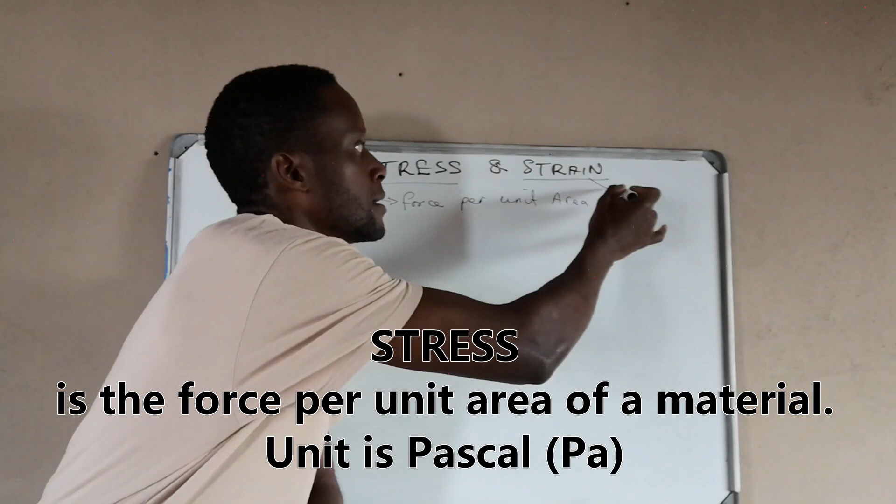Okay, then strain is a ratio between the change in length and the original length.

So basically, for us to understand this, I came up with an elastic. I hope you can see that. So what happens is that if I apply a force on this elastic, it becomes longer. So this elastic, because of the force that I apply on it, it is undergoing stress, and at the same time it is having a strain.

Strain is the change in length. So without applying a force on this elastic band, there won't be a strain. So stress on the elastic causes strain, but then we'll go into detail about how we calculate and how we differentiate those ones. So like we have said, stress is the force per unit area.

You need to know what force is, basically just the unit for force. We know the unit for force should be newtons, we're using N. The units for the area should be square meters. So stress is represented by that symbol.

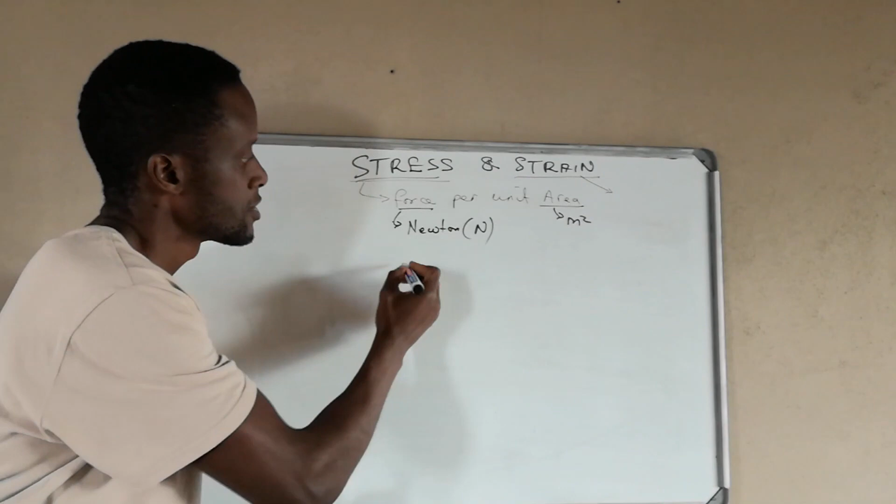Is the force over the area, the unit area of a surface. That is our stress. The unit for stress is Pascal. You'll be using PA as the unit for stress. Pascal, force over the area.

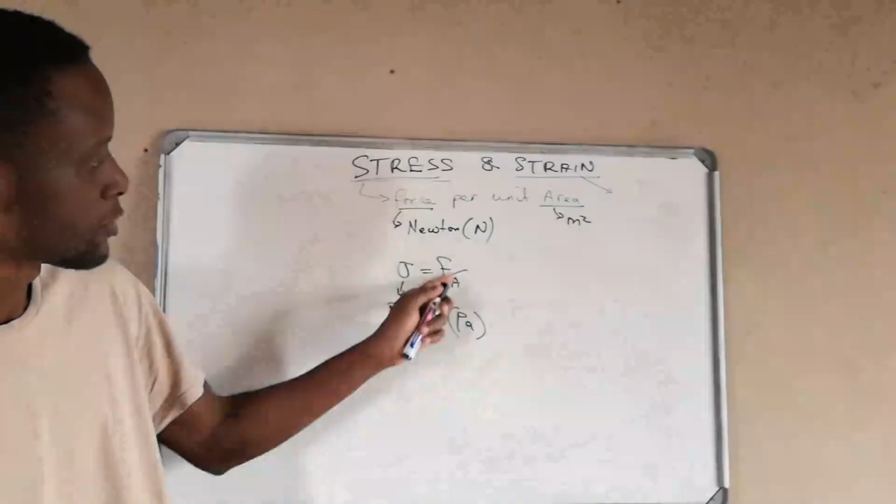If we remember in hydraulics N3, even hydraulics N4, this looks like just the unit for pressure, and the formula looks like the formula for pressure, which is just the force over the area. So our unit is Pascal.

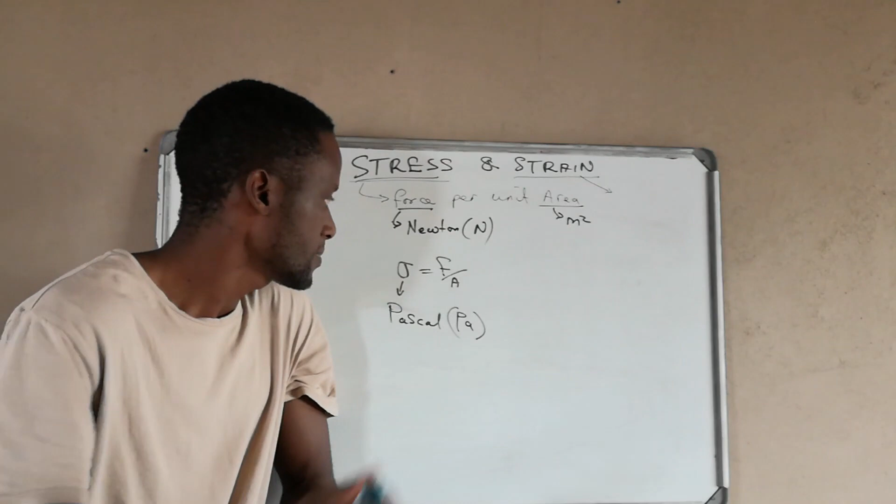Basically, just make sure that your area, before you calculate, your area should be in square meters, your force should be in newtons. Otherwise, your calculations are going to be wrong. So make sure before you do any calculations, make sure you know that your force is in newtons, your area is in square meters. So now, you also need to know how to calculate for areas of basic shapes.

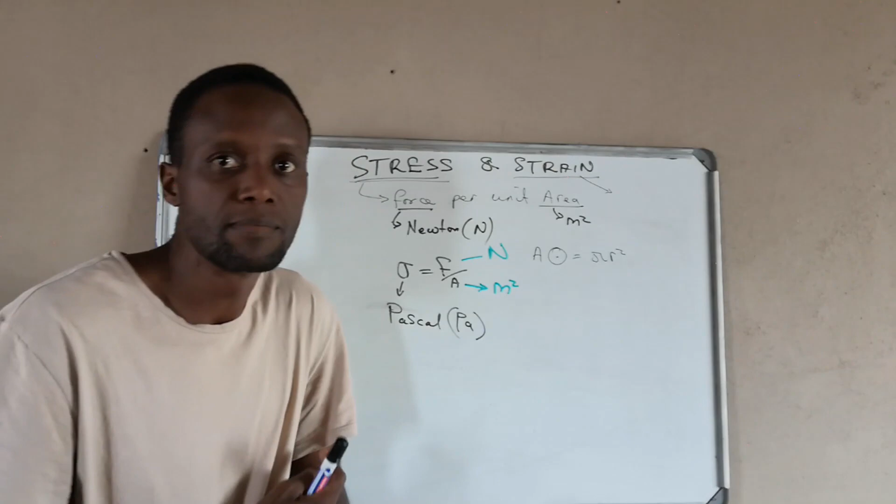Basic shapes, I mean, let's say they say calculate the area of a circle, which is pi r square, pi times radius square. But when you calculate for that area, make sure your radius is in meters, so that your answer is in square meters, in order for you to use it in this formula that we have here.

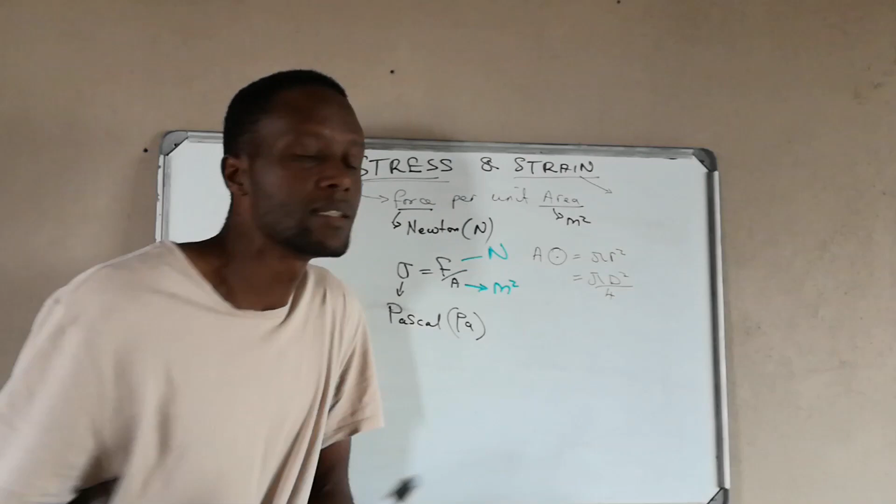Or you can use pi d square divided by 4, we can use that as the area of a circle. Again, your diameter should be in meters, and then when you square it, we get our answer in meters squared. So my whole point, my emphasis is that make sure your area is in square meters. Otherwise, our calculations are going to be wrong.

If let's say area of a rectangle or area of a square, this is L times B. Make sure both the length and the breadth are in meters, so that our answer again is in square meters. Area of a triangle, half times the base times the height. These are just basic shapes. Probably this is grade 7 or grade 5.

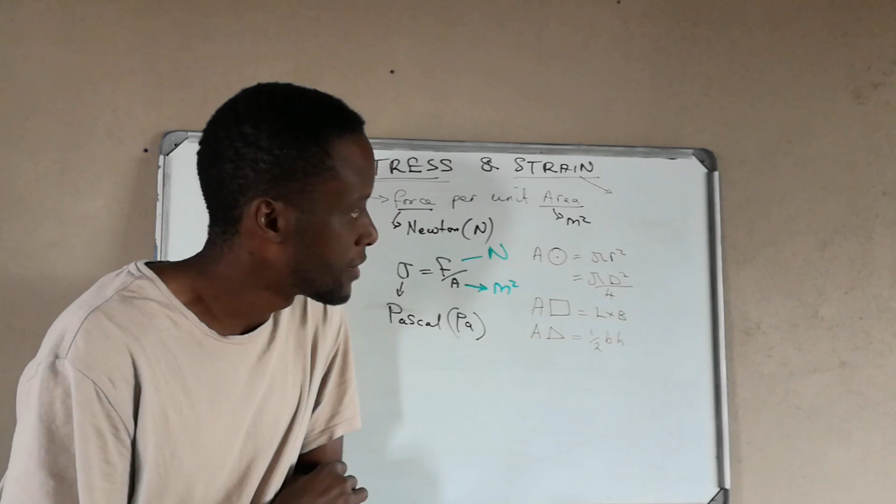So, but we need to know how to calculate area of basic shapes, and also how to calculate the dimensions of shapes. In most of our questions that we might come across, they'll just give you the dimensions of the shape or the profile of the object that you're looking at. Then before you can calculate for the stress, you need to calculate the area separately.

Alright, now sometimes they may not give us the dimensions, but they might give us the area already. And the trick will be that they'll give you the area in centimeters square. If let's say suppose they give you the area in centimeters square, this should be converted to meters square. Now how you convert centimeters square to meters square?

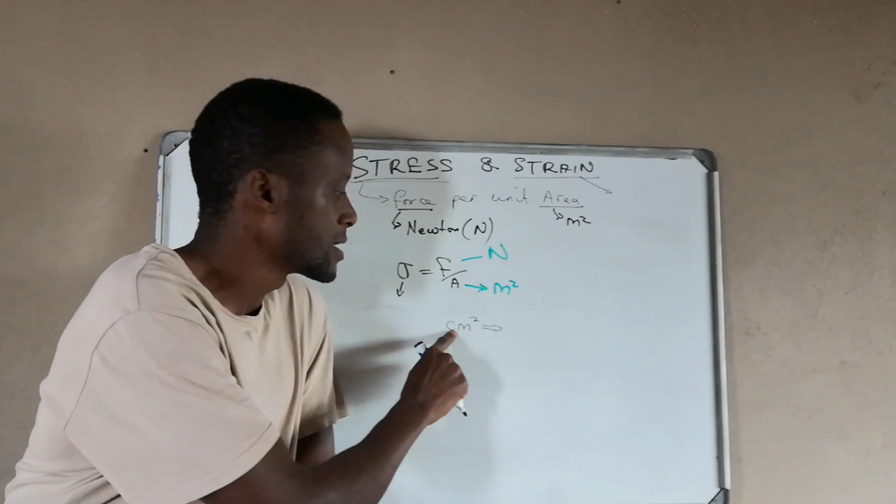What we know is that the prefix for centi is times 10 to the power minus 2, but then we'll square that, times 10 to the power minus 2, times 10 minus 2, then we square that. This becomes exponent minus 4, then this is square centimeters. So centimeters square is to the exponent minus 4. Same applies if we are looking at millimeter square. Millimeter square, we know milli is times 10 to the power minus 3, but when we square that to meters, it becomes times 10 minus 6 meters square.

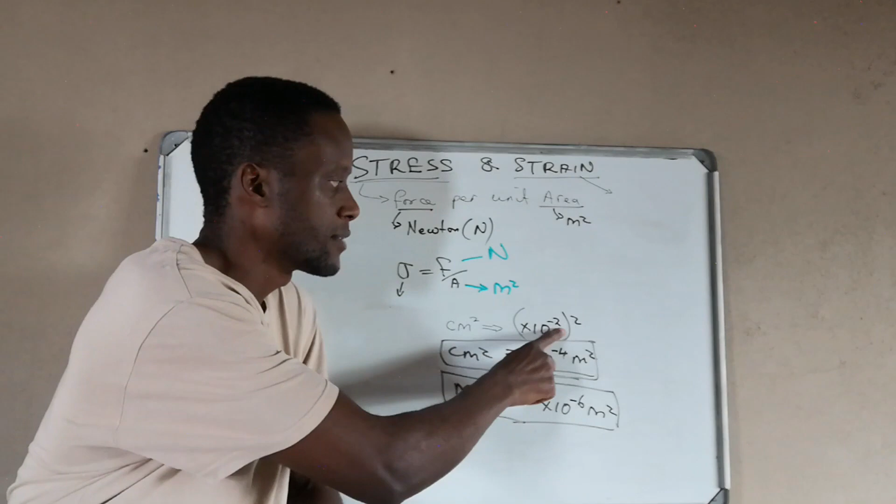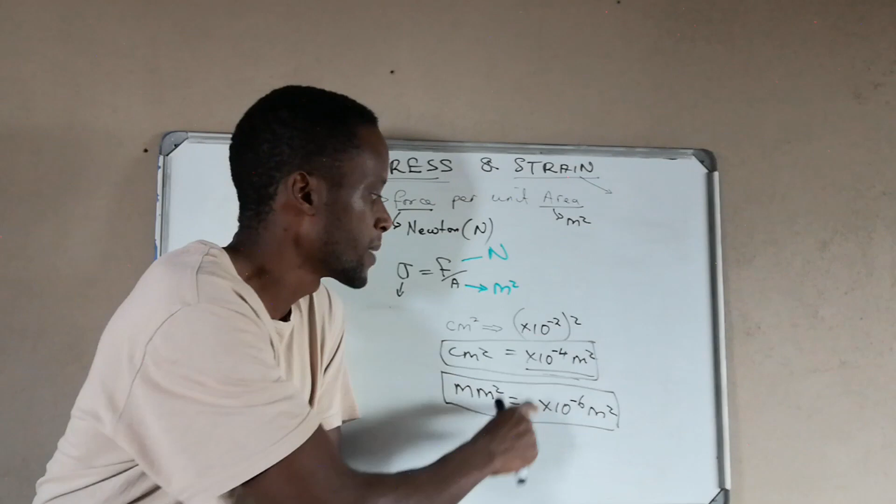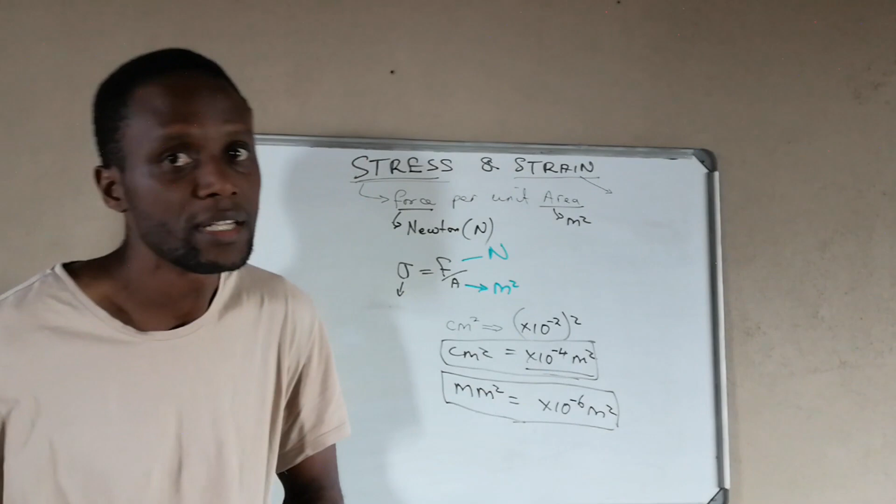This is what we'll be doing in case they give you your area in centimeter square or millimeter square and you have to convert. You can do the same to any other area, as long as you know the initial prefix value for whatever unit is given. If it is centi, we know the prefix value is minus 2, so we square it and it becomes minus 4. The same thing, this was minus 3, we square it, minus 3 becomes minus 6, multiplied by 2. That is how you convert the area given to you, and then it will be much easier to calculate.

Strain is the change, it's a ratio between the change in length and the original length. So with that in mind, strain is a ratio, we should always keep that in mind, which means strain does not have a unit, it's just a ratio, it is just a number.

When we come to strain, it will be represented by that symbol, it looks like a 3 facing the other way. Strain is a ratio between the change in length over the original length. Now all of these lengths should be of the same unit. If you're using meters, then your change in length should be in meters. If you're using centimeters, your change in length should be in centimeters. Other books or textbooks will use X for the change in length, but it does not matter what symbol they use, as long as we know it's the change in length over the original length.

In most cases, this will be a very, very small number, maybe 0.000 something. So in most cases, they will express it as an exponent to a negative power. Let's say they might say maybe 13 times 10 to the power minus 4, as just a number with no units. So strain, that is what we are looking at.

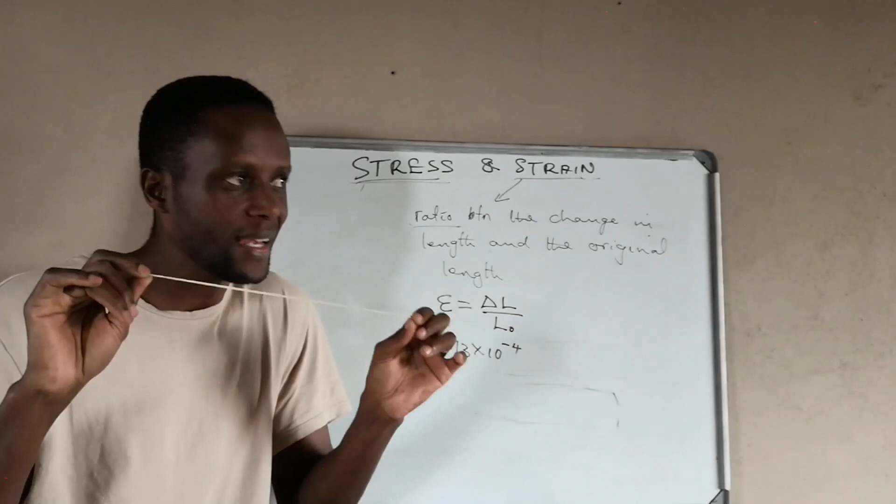There is a change in length. Remember the example I gave of the elastic band. If we have an elastic and we exert a stress on it, what we see is that the elastic becomes longer. That change in length, compared to its original length without any force applied, gives us a change in length. How much extension we have, that is what strain is. It's just a ratio between the change in length and the original length. Strain has no units, it's just a ratio.

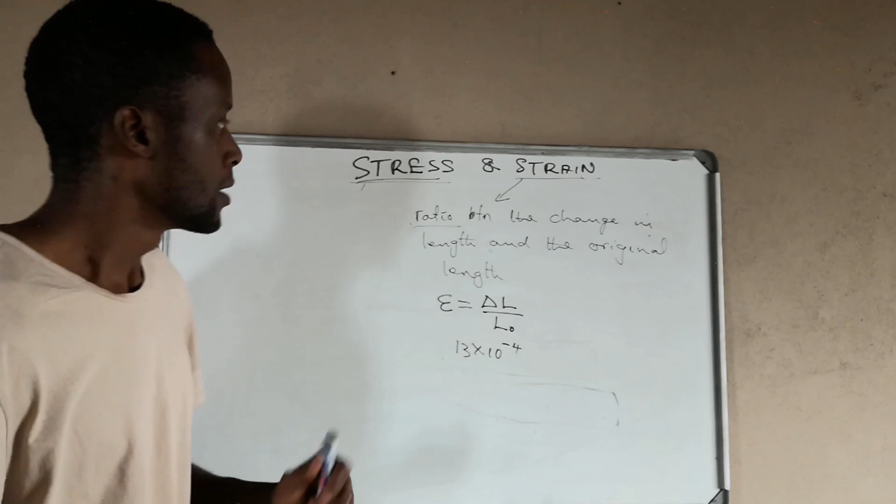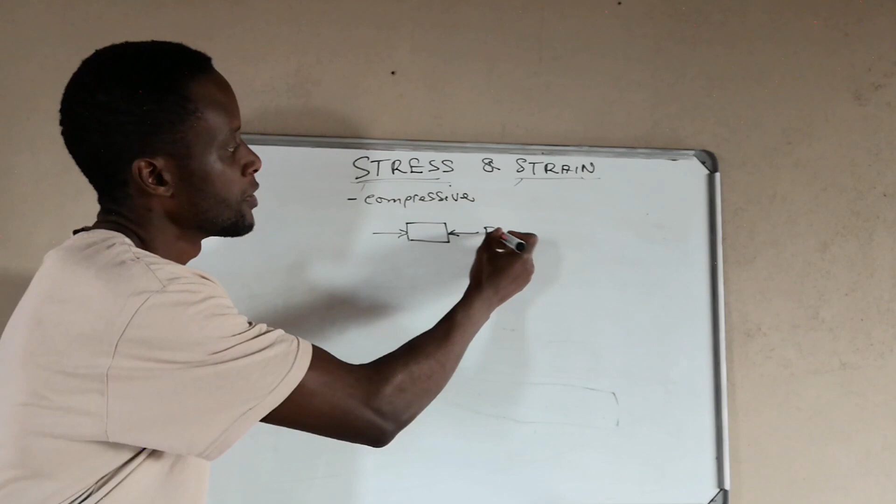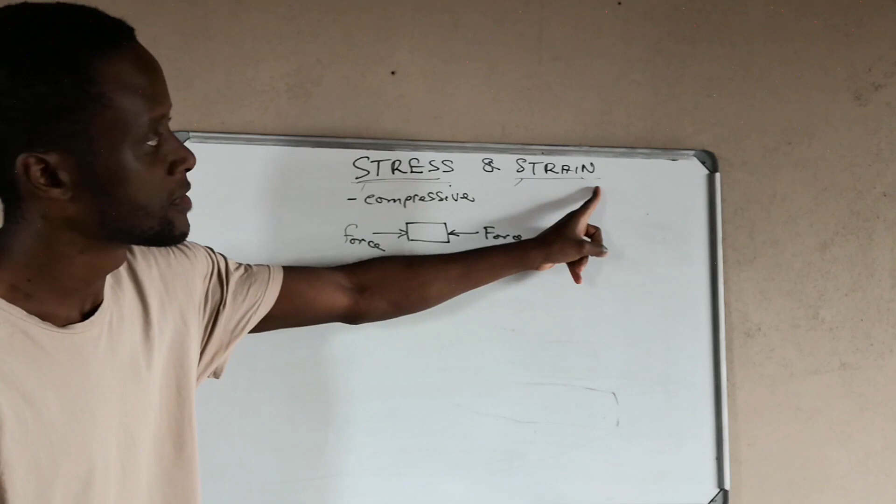It's a unitless value. Now with these two in mind, we cannot have strain without stress. There is no strain without stress. There are 3 types of stresses. There is the compressive stress, or compression, whereby the forces acting on an object - if this is our object, there is a force acting in that direction, and a force acting in the other direction. We are compressing this object from both sides, forces on both directions. This object will undergo a compressive stress. We are compressing it, but if this object changes in its length, then it is undergoing strain.

So strain is a measure. In other words, you can say strain is a measure of deformation, or the change in the dimensions of an object.

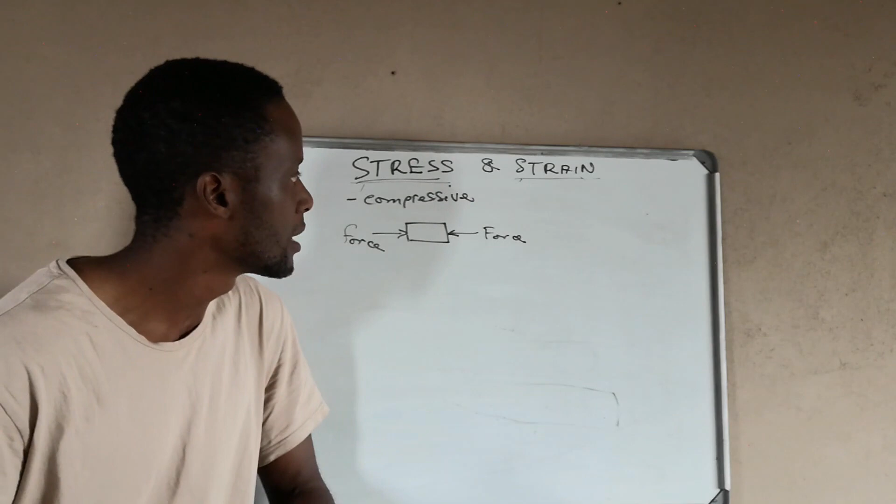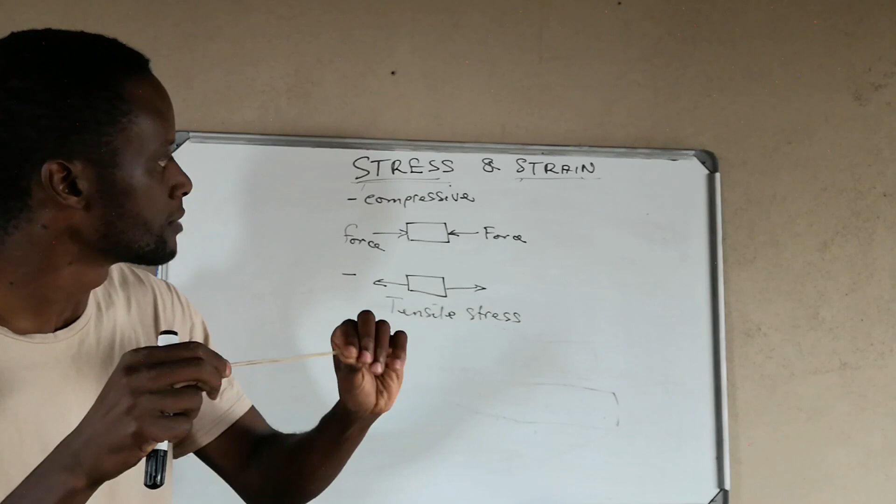Then the other type of stress - we can have an object, and the forces are pulling this object, like the example I gave of an elastic band. This type of stress is called tensile stress, or a tension. We are pulling the elastic in both directions, we are pulling it apart, exposing or making a tension in that object. We are subjecting this elastic to a tensile stress. Then the other type of stress that we have is known as a shear stress.

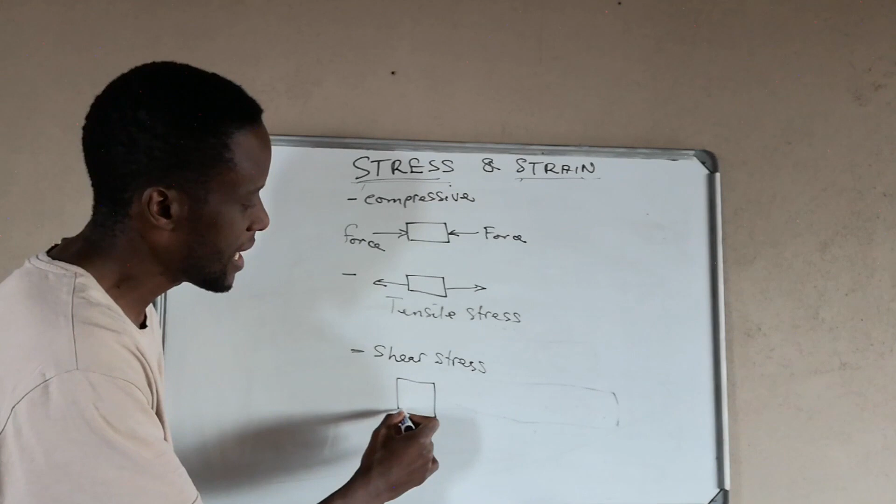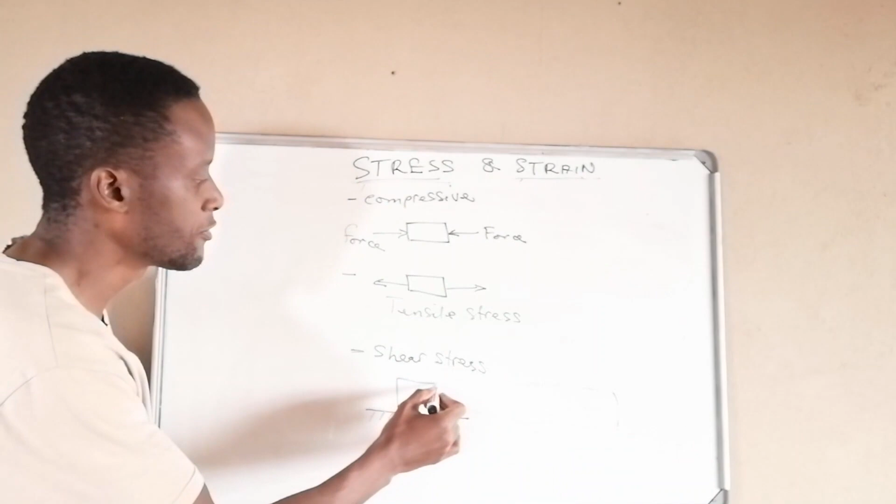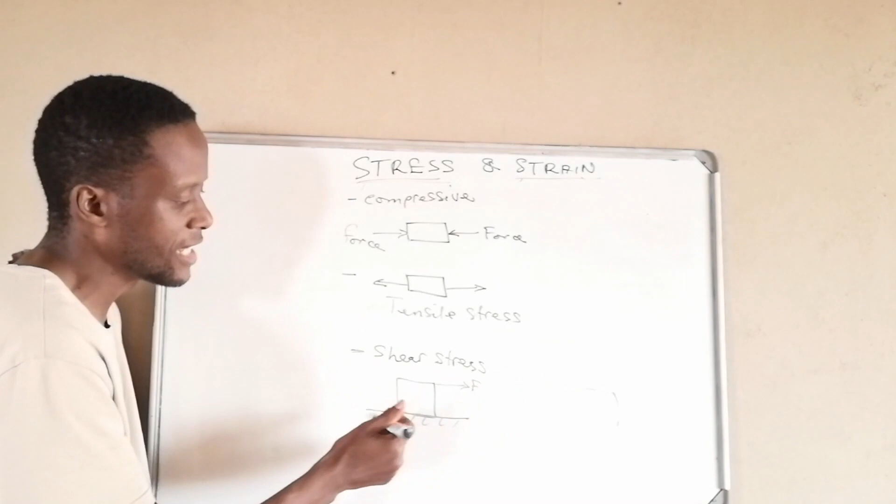Okay, shear stress. The easiest way to demonstrate shear stress is when we have forces that are at a tangent to the object. Let's say this object is fixed on this surface; it will not move. The force acting on it is acting at a tangent, at a surface point, whereby if the force pulls in that direction, this object will deform to go in that direction. It will shear off, it will slant in that direction, but the object still does not move, it remains in the same position, but it is sheared into another shape. So this object is being subjected to a shear stress.

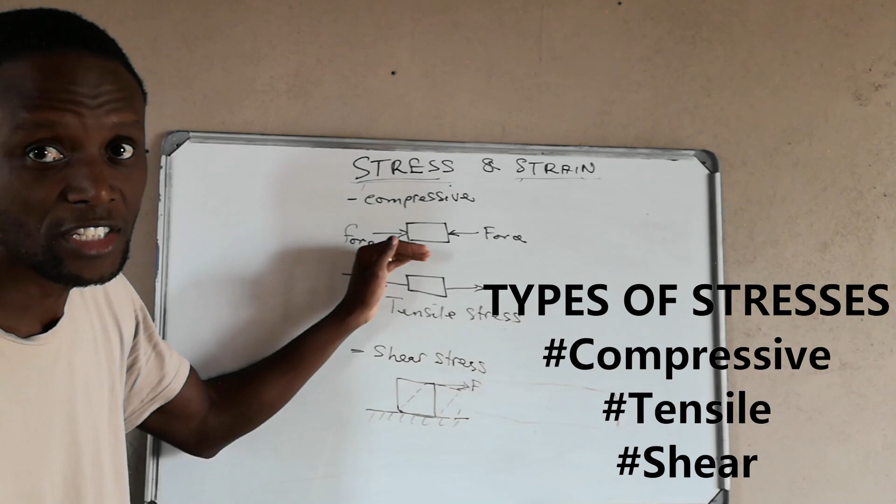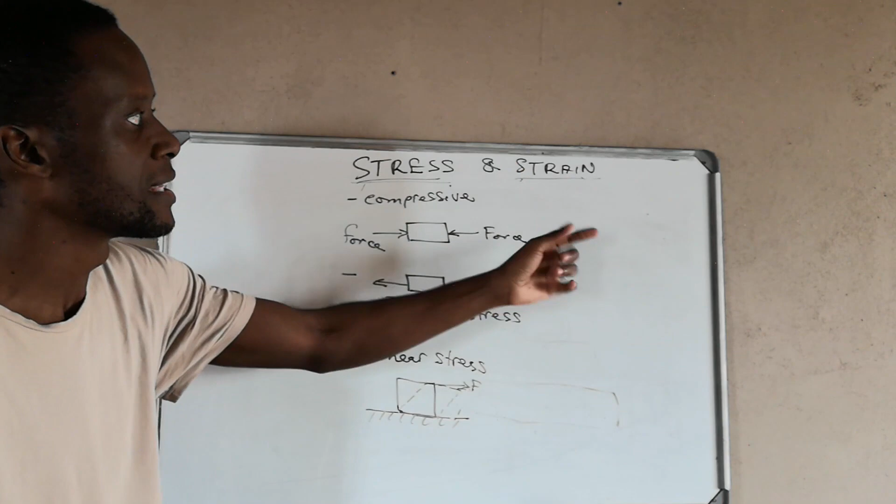As long as the object moves or changes its dimensions, there will be a strain associated with that. So as long as there is a stress, there will be a strain. We can never have a strain without a stress.

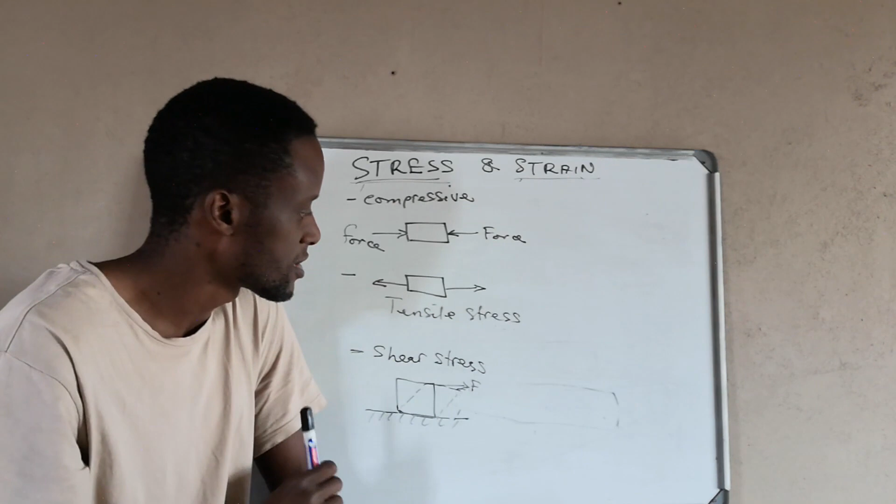You need to know the three types of stress, but the unit still remains the same: stress is measured in Pascal, while strain is unitless. Whether it's a compressive stress, a tensile stress, or a shear stress, we shall always have the unit in Pascal. Now, with these two combined, since we can never have a strain without a stress, we are required to know or state Hooke's law.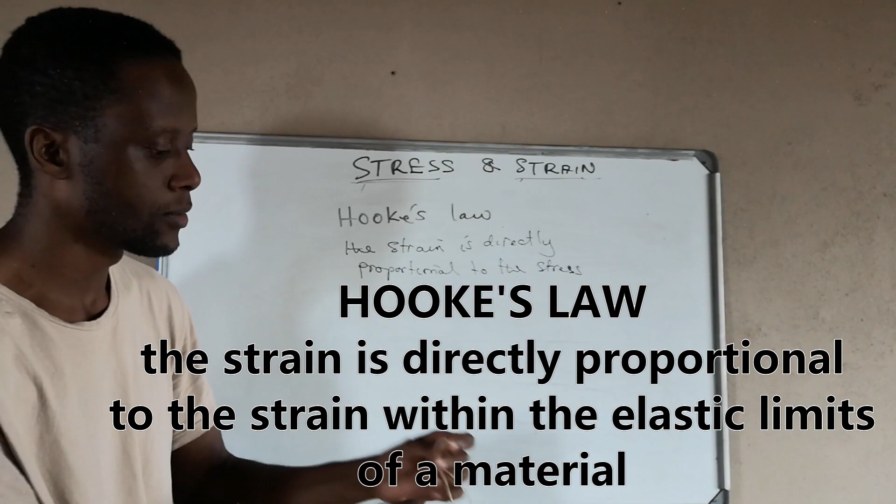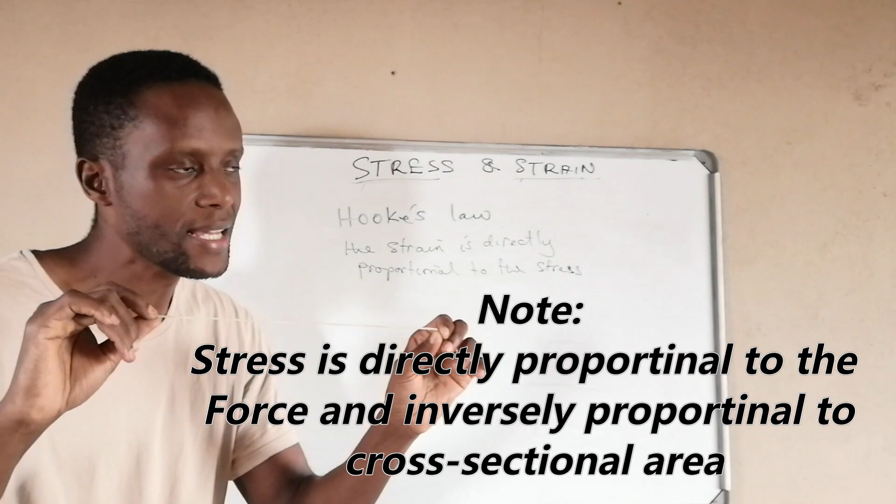Hooke's law states that the change in length, the strain, is directly proportional to the stress. The strain, the change in length, depends on the stress. If I apply a small stress, a small force, then the change in length will be less. But the more stress we exert on this elastic, the more the strain, the change in length, becomes longer. So Hooke's law states that the strain is directly proportional to the stress for any object.

This applies for any object that is under the elastic limits. Elastic limit means elasticity - one term you might be required to define. Elasticity or elastic limit is what this elastic is doing: when I pull it, exerting a stress on it, once I release that stress, it comes back to its original dimension. That is what elasticity is.

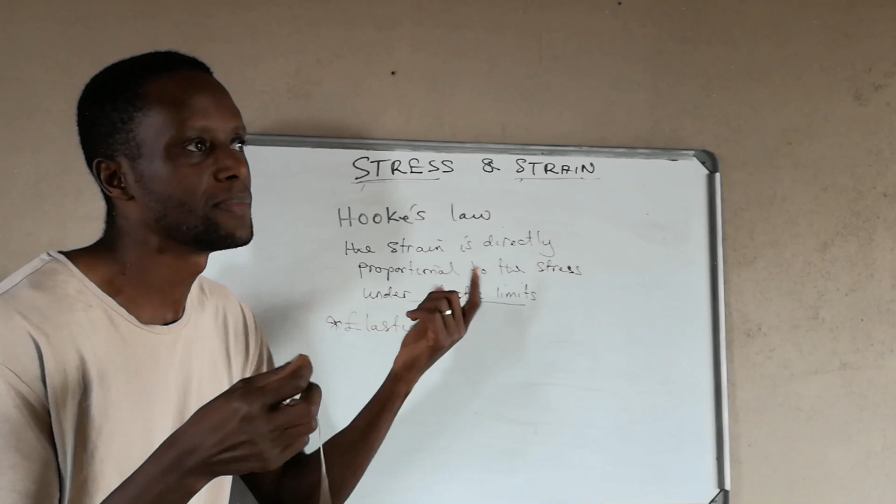So for any object within this elastic limit, as long as I apply a stress, the strain will be directly proportional to the stress applied. How much change in length depends on the stress applied, but that is only true within the elastic limits. For example, if I continue pulling this elastic, it breaks - we have exceeded the elastic limit of that material. Once you exceed the elastic limit, the material will break, you are no longer within the elastic limits, and therefore Hooke's law will not apply.

Hooke's law only applies within the elastic limit, where the object has not deformed - it's still coming back to its original size. That is Hooke's law: it basically states the strain is directly proportional to the stress under the elastic limits of a material.

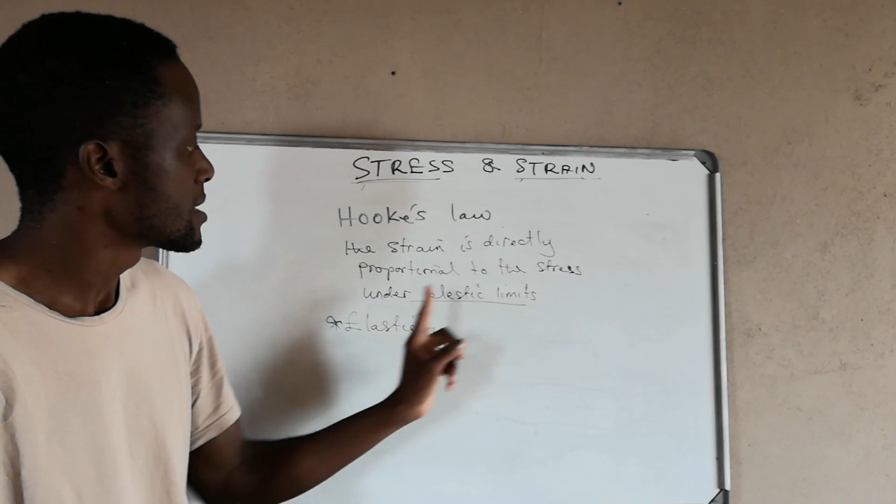The other thing we are required to know, besides stress and strain, is the modulus of elasticity. Modulus of elasticity is just the stress per unit strain. It will be represented by the capital letter E, which is your stress over your strain. Other books represent modulus of elasticity with Y, stress over strain, but it doesn't matter which symbol you use.

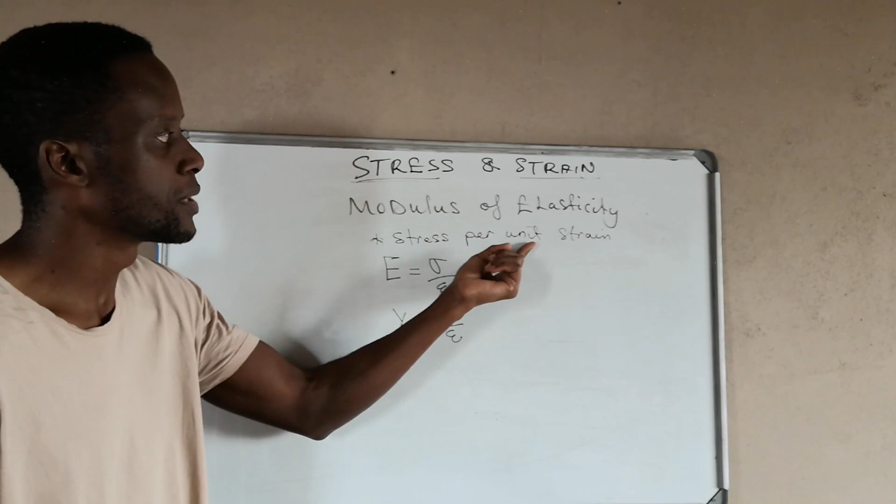Modulus of elasticity is the stress over the strain, and it represents how much stress is required to bring about one unit of strain - stress per unit strain. So what we are dividing: the unit for stress is Pascal, while the unit for strain is no units, just a number.

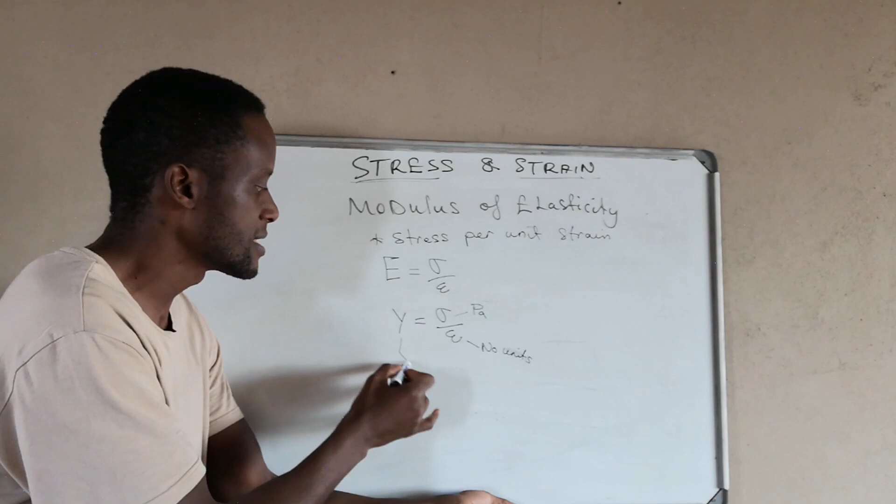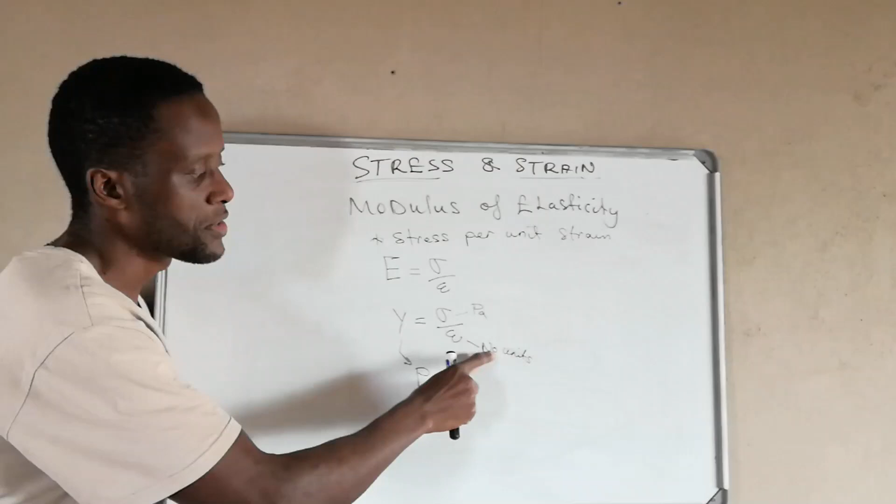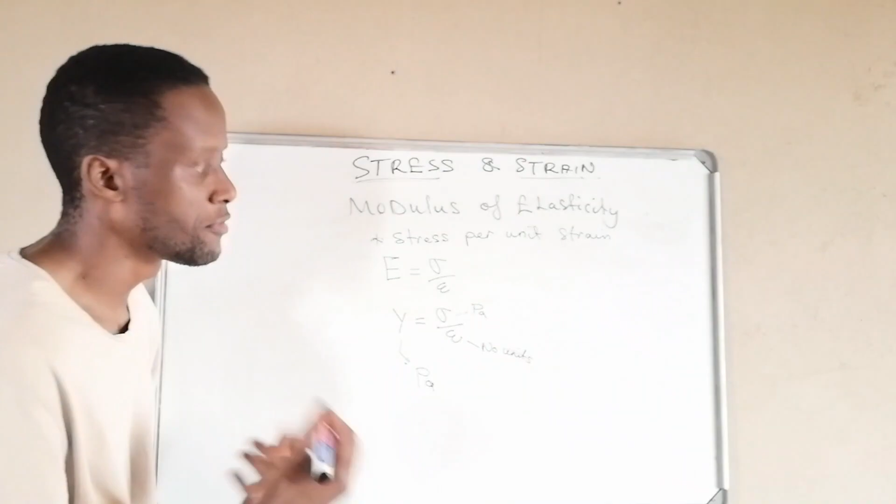So the unit for Young modulus of elasticity is Pascal. Now, with this, we are dividing a very small number - remember strain is a very small number in most cases - into a big number, and therefore in most cases you find this Young modulus of elasticity to be a very big number. In most cases they like to represent it as gigapascal as the standard unit for Young modulus of elasticity.

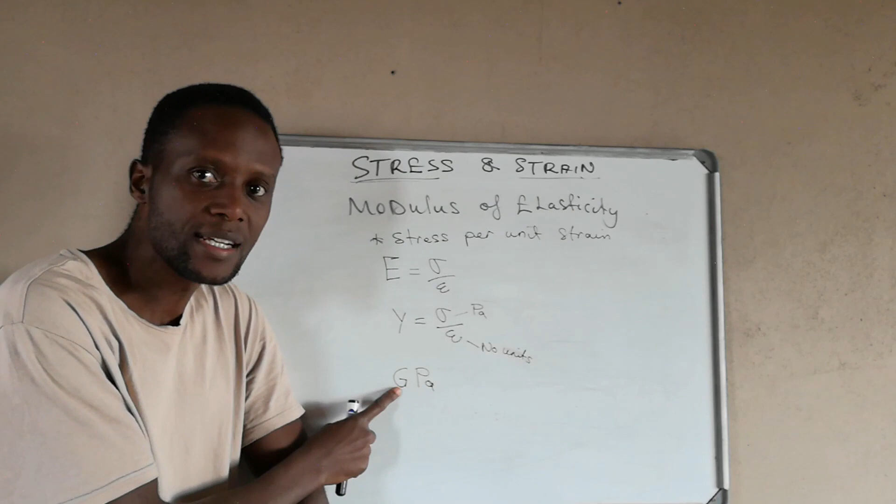But as we know, giga is just a prefix. Even if we have megapascal, it's still a unit for modulus of elasticity.

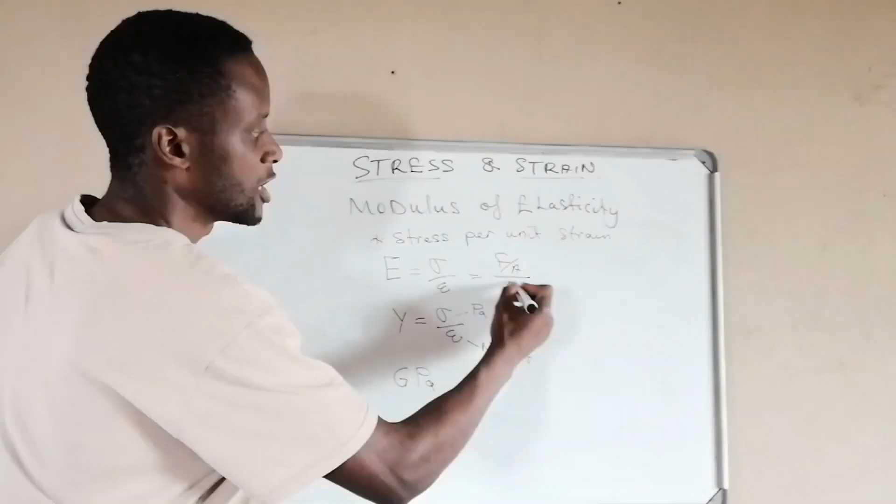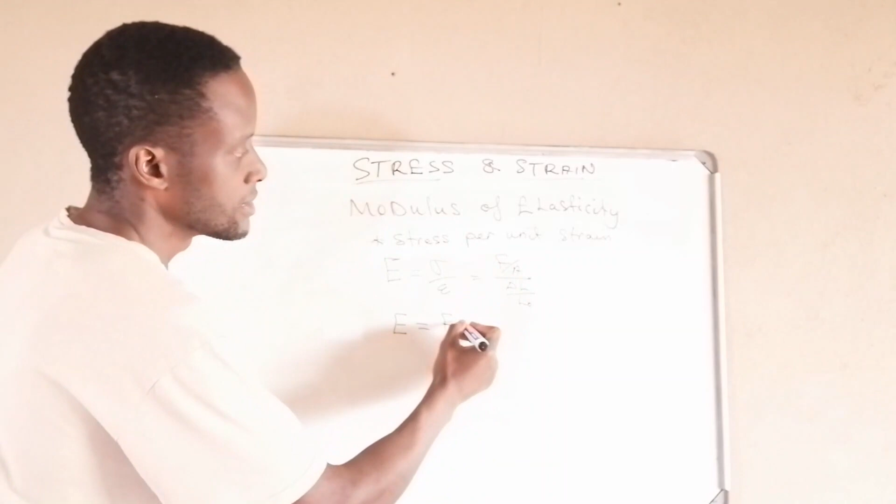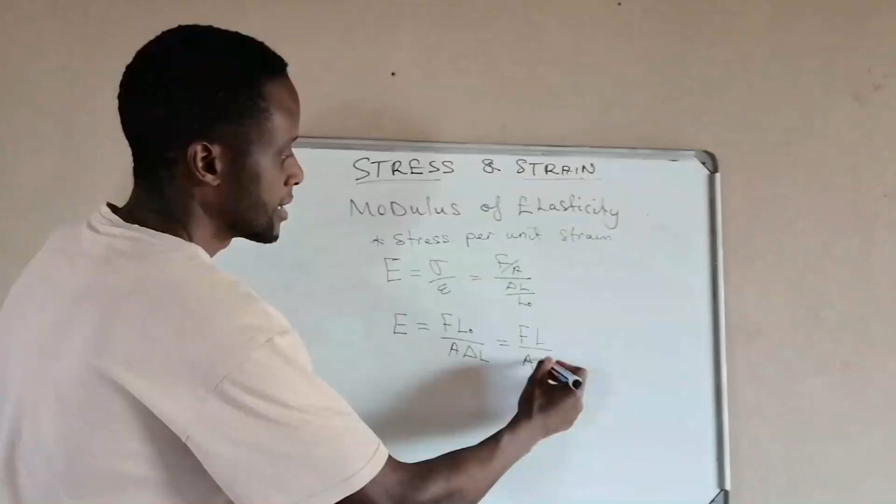So with stress being equals to the force over the area, strain being equals to the change in length over the original length, if we break down these ones, that's what we're having: Young modulus of elasticity is equals to the force times the original length over the area times the change in length. In our formula page, they'll give us force times L over A times x for the change in length, and still we can get all our calculations as that.

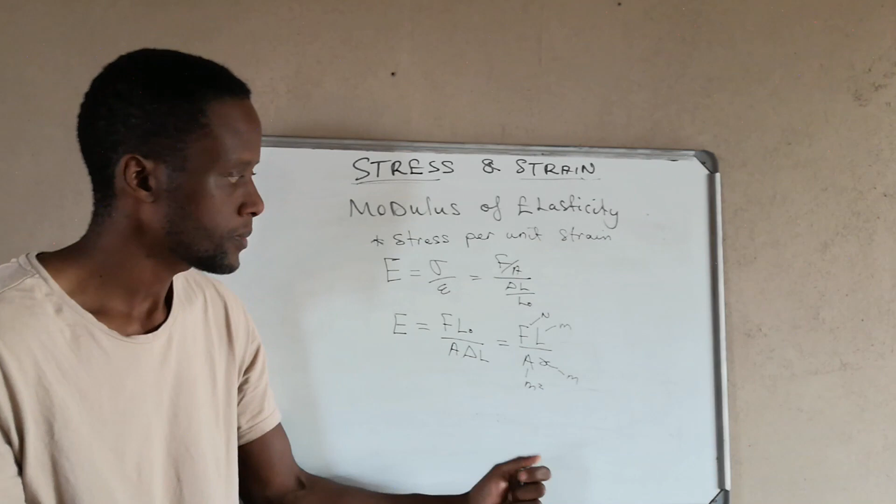So my emphasis again: if you are using this, make sure your force is in Newtons, your length should be the same units as your change in length - if your length was meters, your change in length should be meters. Our area is in square meters, so we can calculate for our Young modulus of elasticity, and modulus of elasticity is in Pascal - sometimes it can be gigapascal or megapascal.

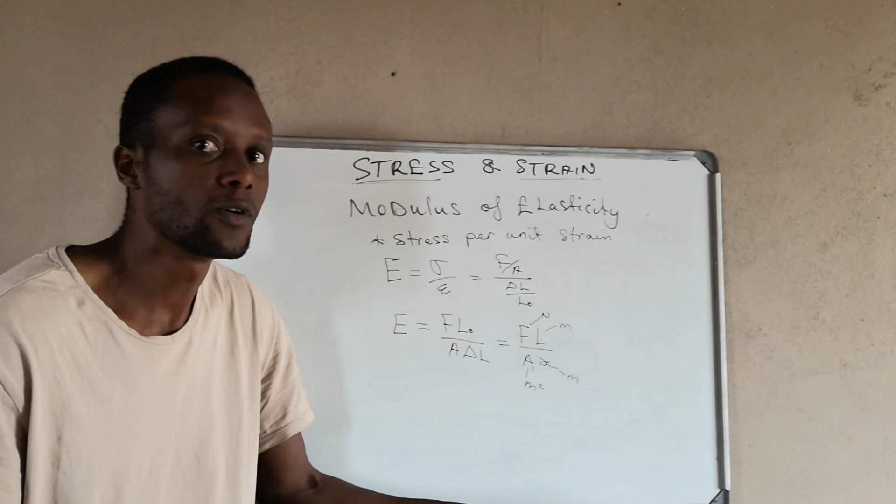That basically concludes our stress and strain. So we have our stress, we have our strain, we have our modulus of elasticity, and then we can calculate.

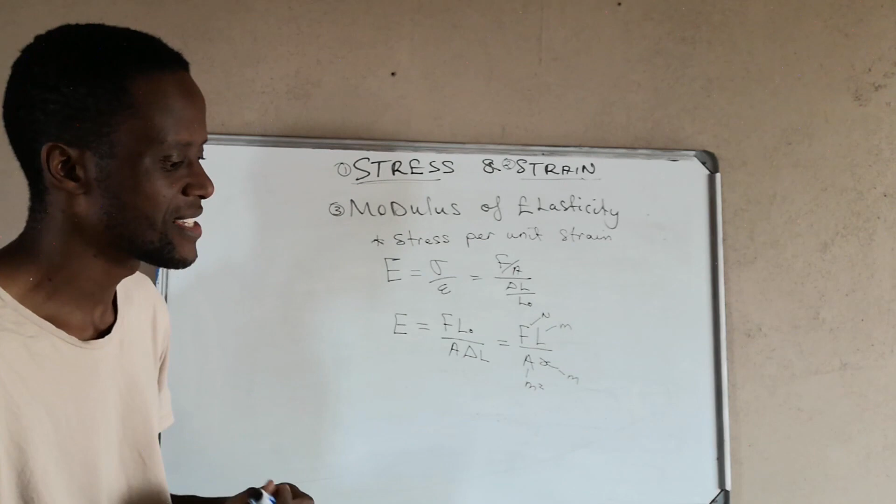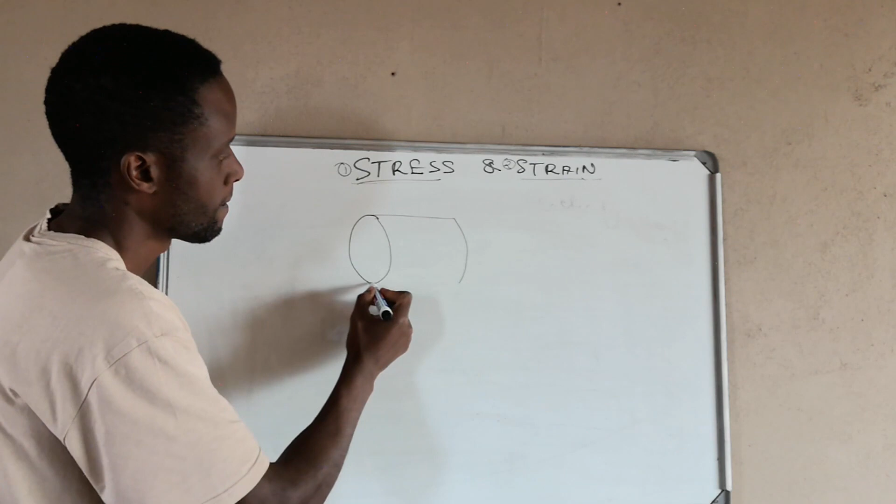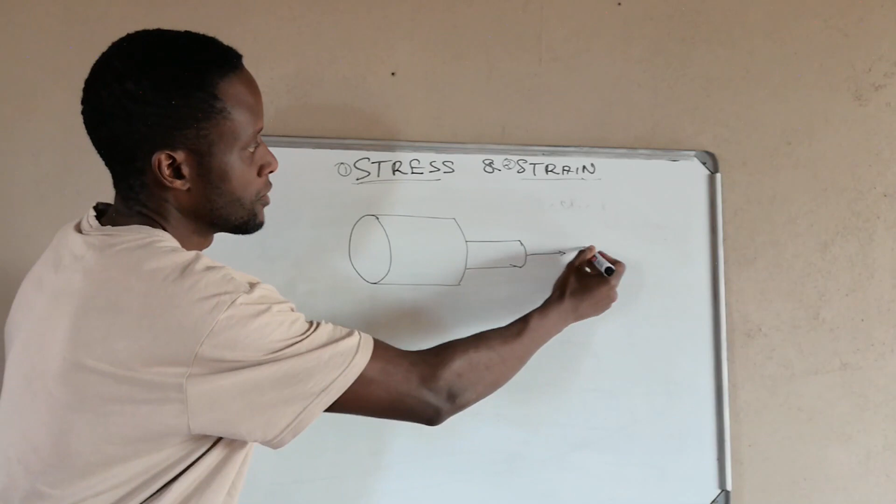Now, most common questions that we'll find are mind challenging questions. What we should also keep in mind is that if we have an object that has different dimensions - let's say we have an object like this, the diameter of this object - let's assume we have an object of different diameters, different sizes, but it is subjected to a force. With this object, the length - let's call this object A, object B.

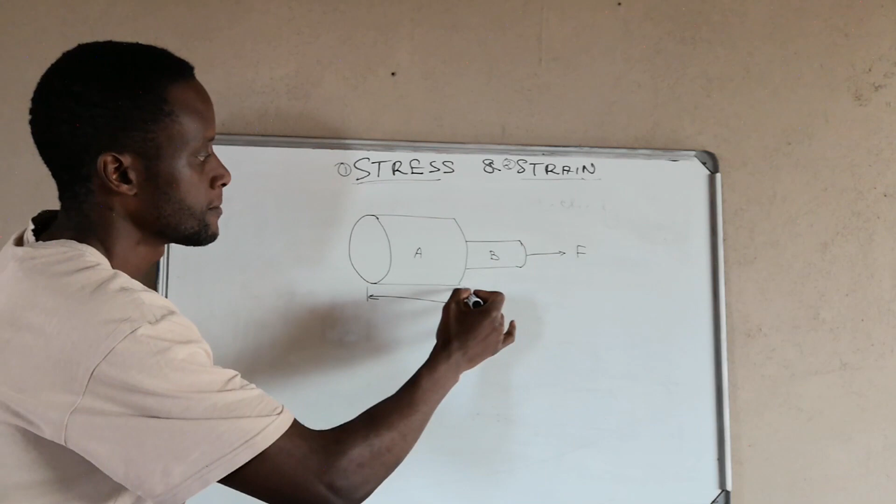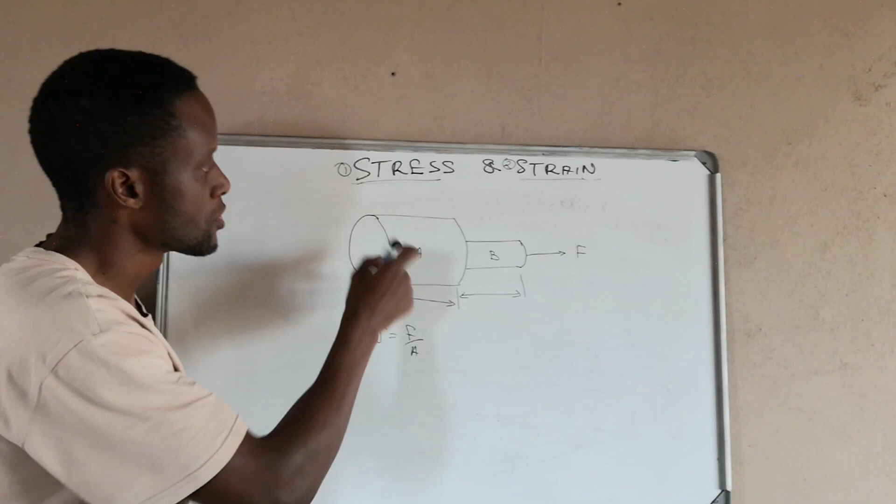This object might be made of the same material. The stress that object A will undergo, and the stress in object B, will not be the same. The stress in object A is the force over the area. So you calculate using the dimensions of A, area of A - the force in this case will always be the same throughout this object, but the stress depends on the area. So with a thin part, stress is the force over the area of this object, depending on how the object is. Alright, I hope it makes sense.

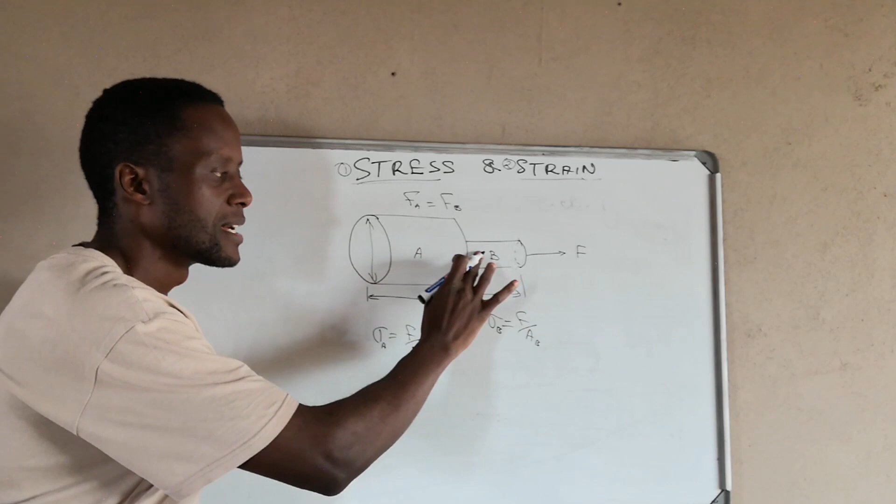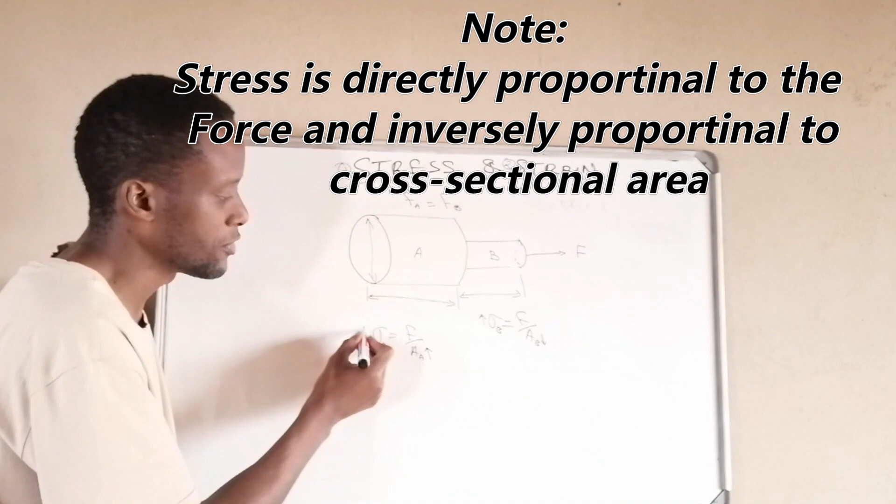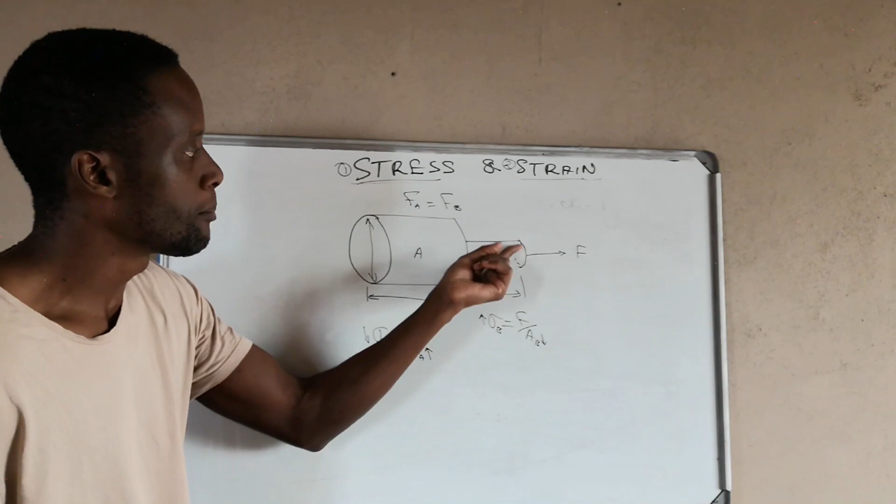So with the force being the same throughout, force in A is equals to force in B. The force remains the same, but the stress in A and the stress in B depends on their sizes. This thin object, the area will be less, therefore the stress will be high. For the thicker part, the area will be high, therefore the stress will be low, because stress is inversely proportional to the area. So the thicker the object is, the less the stress - the more thin part will experience a lot of stress.

Also, when we come to the strain on this part, the strain on A, you calculate your change in length for A over the original length for A, and also your strain for B is your change in length for B over the original length of B. Now, the reason why the strain will not be the same goes back again to Hooke's law, where we are saying the strain on an object depends on the stress - strain is directly proportional to the stress. So the strain on B depends on how much stress B undergoes, and as well the strain on part A, how much it will extend by, depends on how much stress it experiences. So the strain in each part will not be the same - it will depend on how much stress each part undergoes.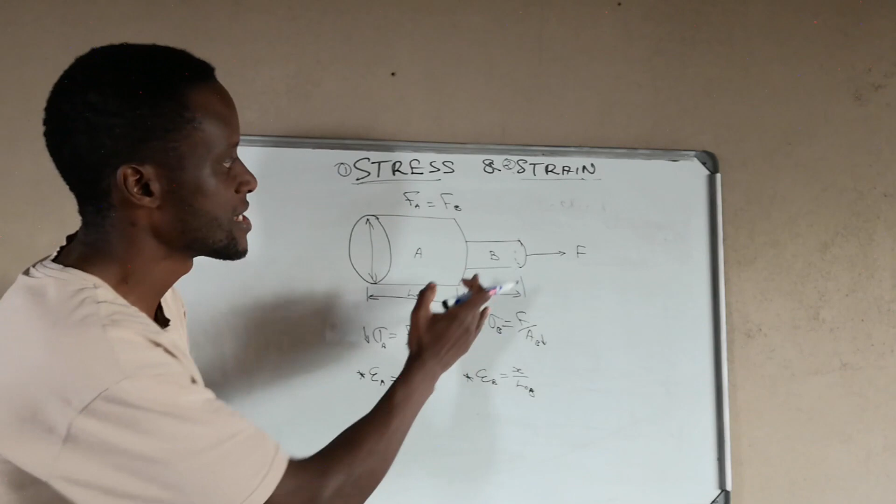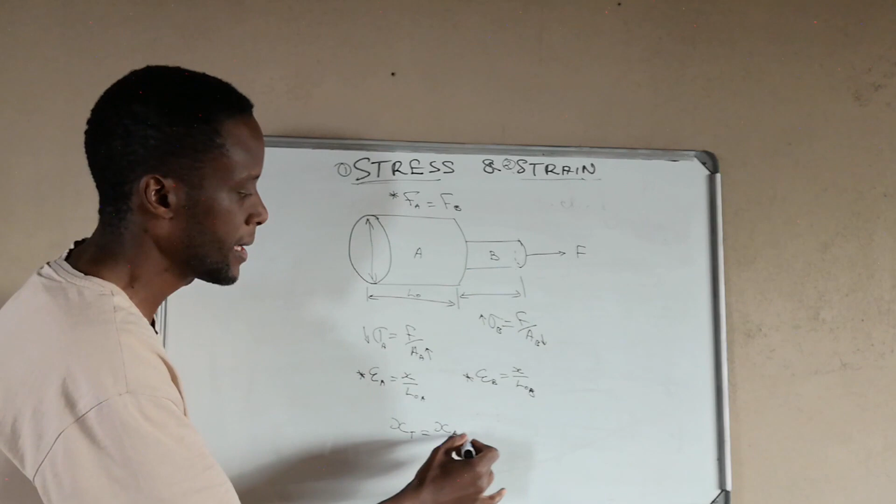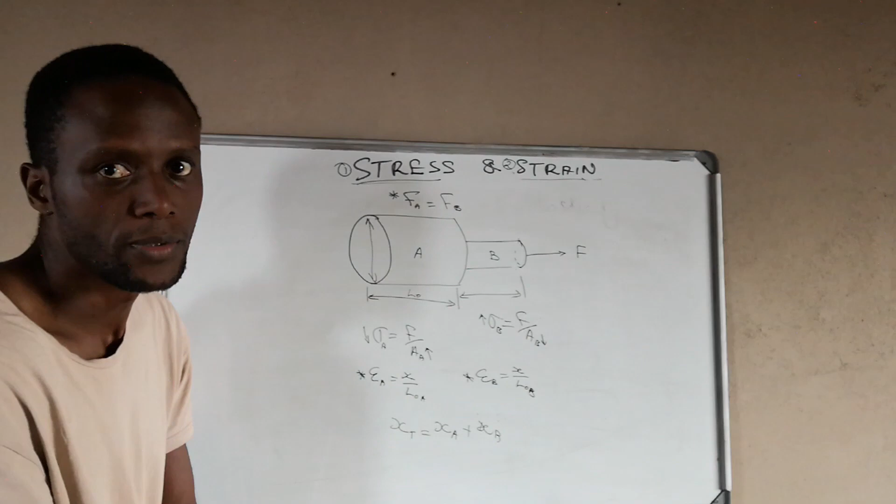However, what we need to emphasize is that the force throughout the object will remain the same, because both of these two parts are not going to be extending at the same time. So extension on A plus extension on B - that will be our total extension, how much it extends by, and that is what we'll be looking at. Otherwise, it's a very simple topic and you should be able to calculate any question that comes.